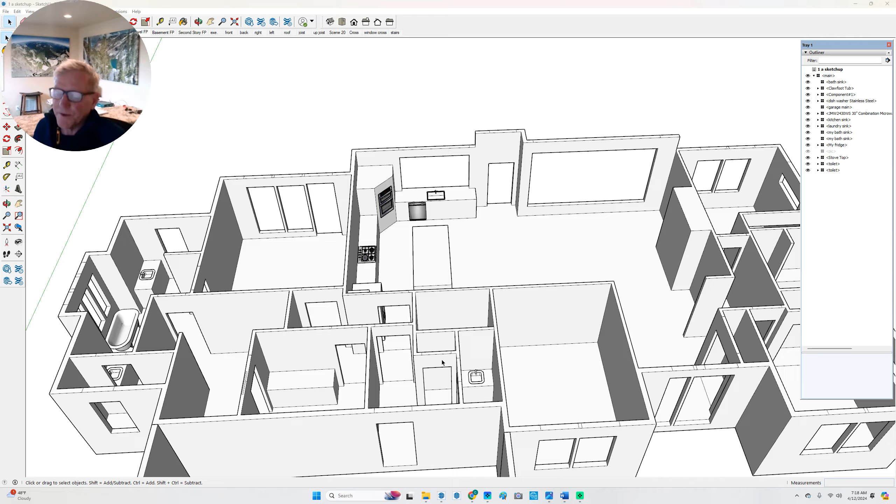Mike, I know I'm doing this exactly like it is, but I can't help but see some problems as a builder, finish carpenter or whatever. But maybe you don't have this problem that I have discovered.

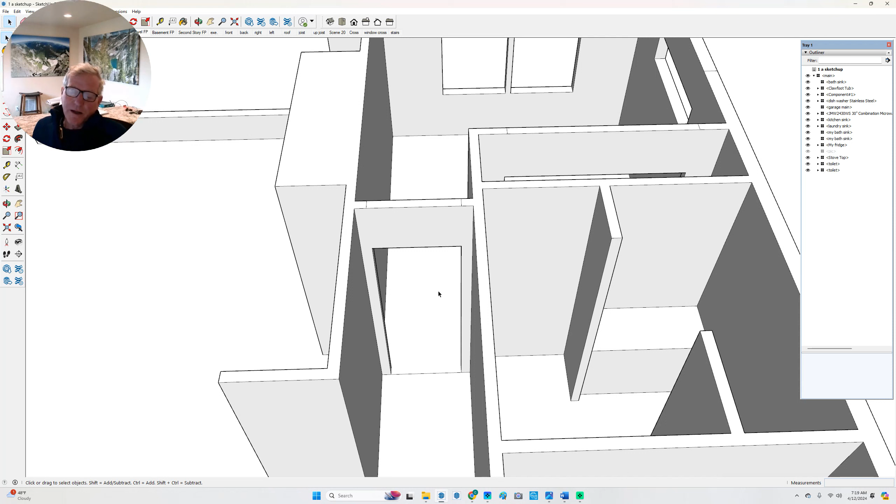If you look at the plan, he has like 3'4", I think, and then he puts in a door that's a 2/8 door. You've got to allow more room because everybody seems to go with a 3.5 inch wide trim, and every once in a while they want to do this overhang. This hallway is a 4 foot hallway, and this is a 3 foot door. With a 3.5 inch trim, you wind up with about 1.5 inches on each side, which allows you to hang this over 1 inch and still have a little space. So for plenty of space, you need 1 foot over the size of the door.

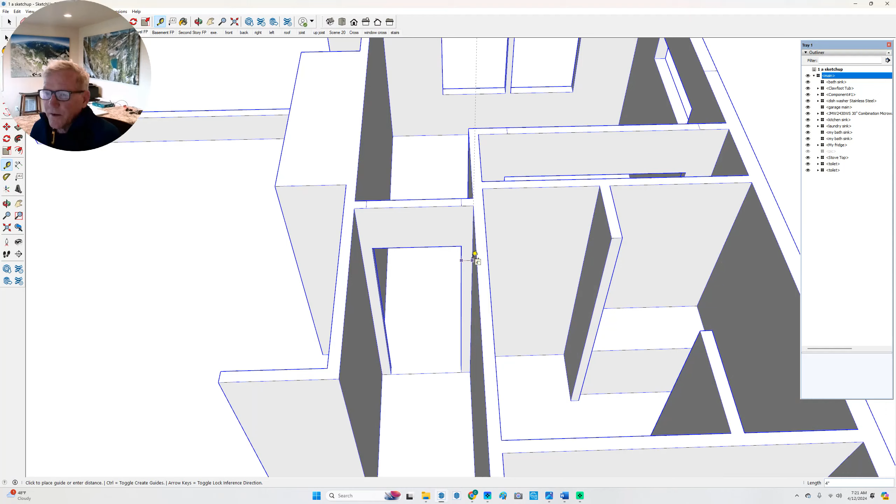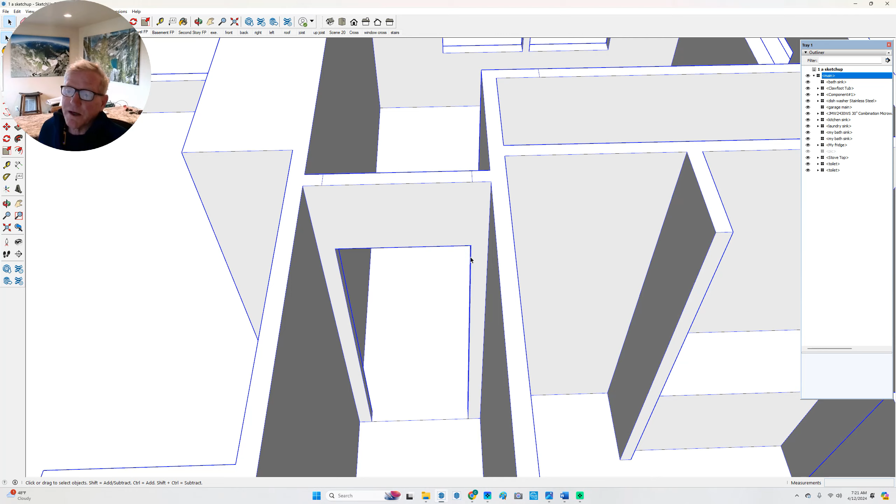I go down to 5 inches all the time, but 4 inches is tight on each side of the door beyond the slab itself. So here and in several places, I always do the slab of the door in my opening. Beyond the slab of the door, you're going to have 4 inches to the wall on each side. I think it goes back to the days of colonial where everybody used 2 1/4 or smaller trim. Now they use 3.5, and it's surprising how people haven't caught up with it.

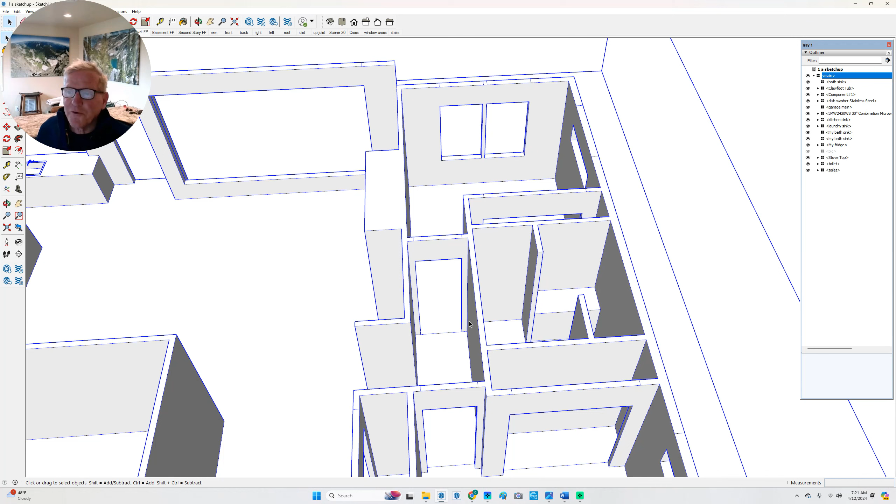I had a kitchen designer on my last two kitchens who didn't allow for 3.5 inch trim, so he had to build new cabinets, two uppers. He said, 'Why'd you use such wide trim?' I said, I've been using that trim for 7 years. But anyway, if you're comfortable with that, that's fine. I'm just warning you of that, and that's not that big a deal. I just put in the doors he had and the hallways he had.

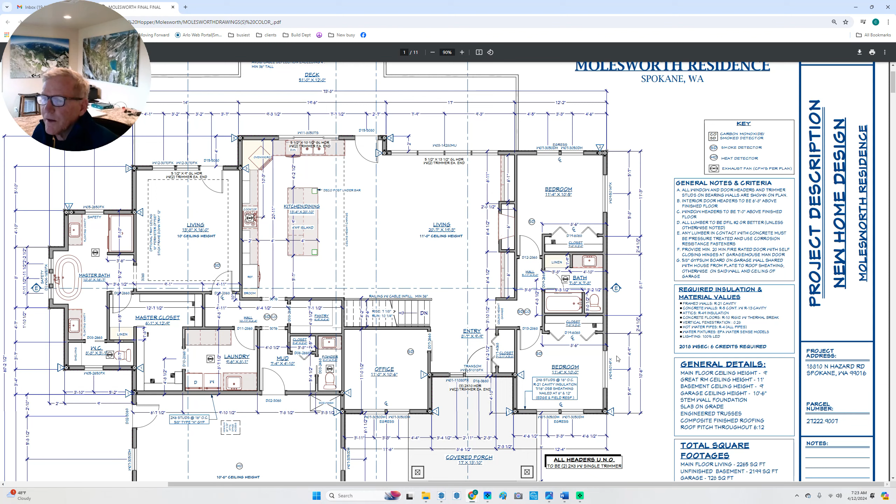But then another design thing, and I don't mean to pick on the guy - if you look at the plan right here, I built this exact bathroom with the exact stuff in it, but never have I built it this way. Again, if you're fine with it, I'm fine with it. But to me, this toilet is so cramped in there, and you have this nice big linen when it's just gonna be a shelf - you don't need a big linen, this is just linen shelves.

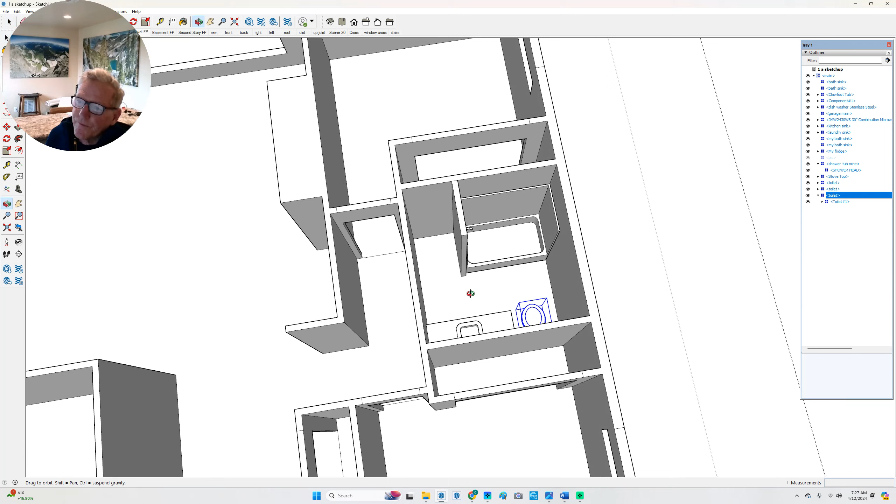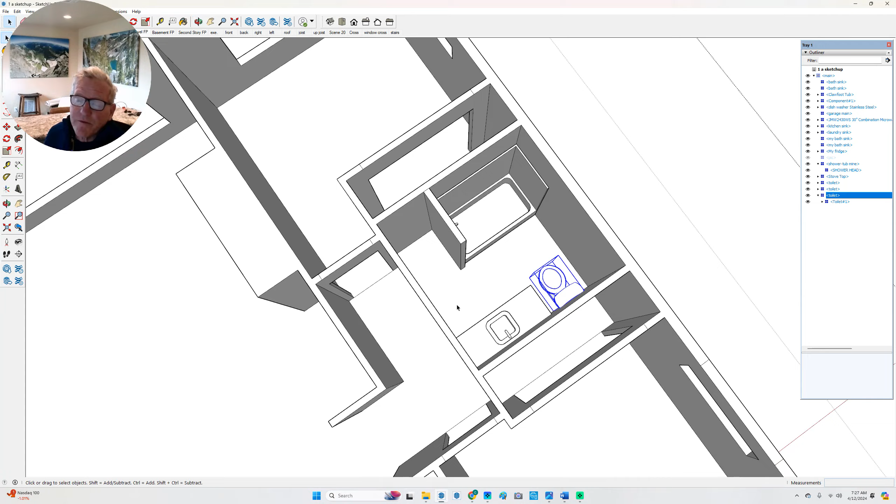This is the way that I always do it - that would be your linen space there. Then you get a much nicer vanity, and a much nicer space for this, and everything else works the same. I don't think the one they've got is as functional. The other thing I always do is put a window right there, just a small window. But I don't want to go back and forth - that's the only design thing I say, gosh, it just doesn't look good to me.

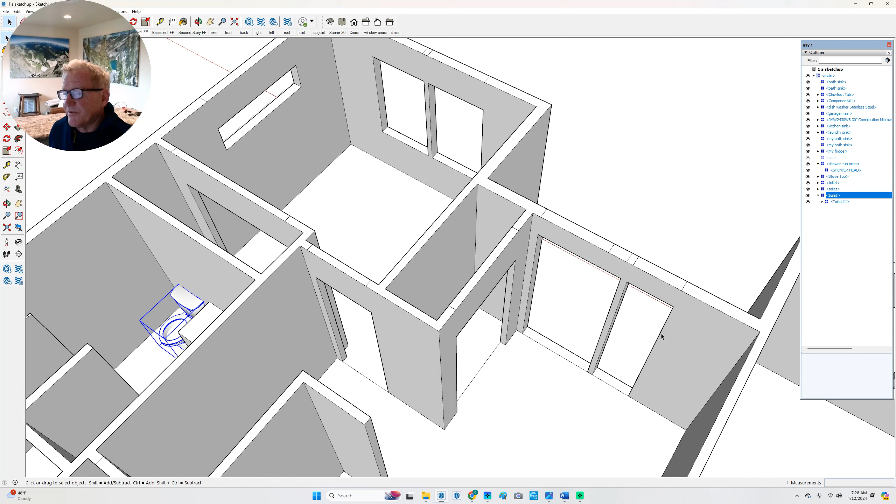Another thing he's doing, as far as the 4 inch to the next wall, he's got that going on right here too - you only got 4 inches from the slab itself to this wall. Part of that is because he centered this in this space, so the center of this opening is in the center of this wall. If you reduce this window, he's got it at, which I think is a weird size, 1'10". Go down to 18 inches or 16 inches would be better, and that would bring this over some. That'd be the way to get rid of it, because you want this to be that depth, and you do want this to be centered.

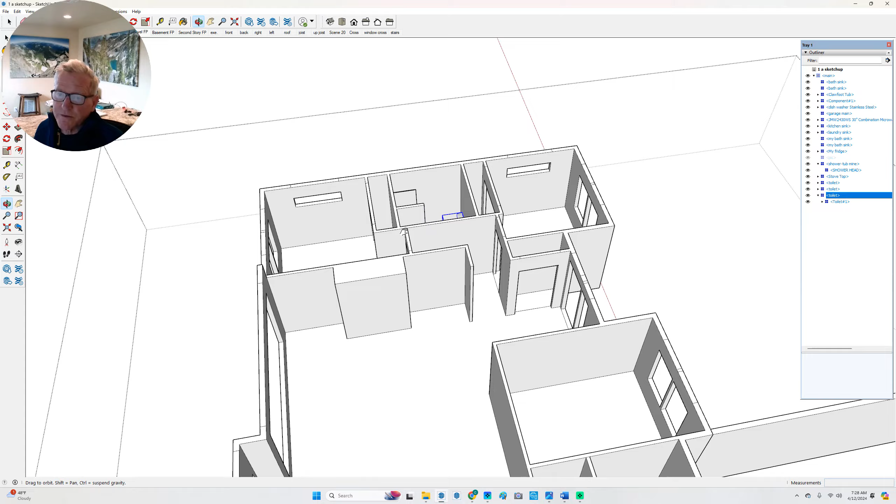But anyway, that's another thought. They probably did work out all the windows, but it's pretty unusual to put such expensive windows as the double hung, two double hungs back here. It's for looks, and maybe these - like I said, they probably talked all about it. They love double hungs, and that's fine.

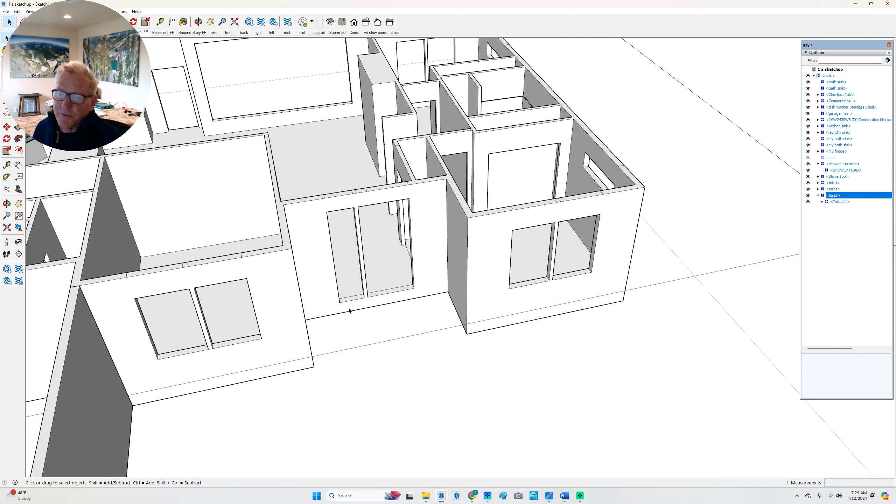I don't understand this. If you look at the plan, it shows this being an 8 foot tall window, and this being an 8 foot tall front door, and that don't work. For this to be 8 foot means it had to go right to the floor. But maybe that's what they want to do - they do make windows like that.

Then another little thing - he's got a 2-4 pocket door that ain't gonna work here. He's only got 2'1" there. There's no way a pocket door is gonna work there at 2'8" or 2'4". I've had this situation in my own house - I just swung the door out. It didn't hurt nothing. Everybody thinks you got to open the door going into the bathroom, and you don't. A 2'4" door right here swinging out would be just fine.

The other thing, it looks like this window must go all the way down to the cabinet top. And another thing, these are 11-foot walls - if you look carefully down at the cross sections, these are 11-foot walls. You're going to get hammered right here, and that's one reason you draw these plans - I would never draw the window coming that close. This is the opening, it's got all these windows molded together, and you're definitely gonna have to have engineering for these tall walls here.

Do you really have to do a tall wall here in the master? You're already at 9 foot. But at any rate, this is a tall wall too - this is a 10-foot wall, I believe, this is an 11-foot wall, and this will be an 11-foot wall.